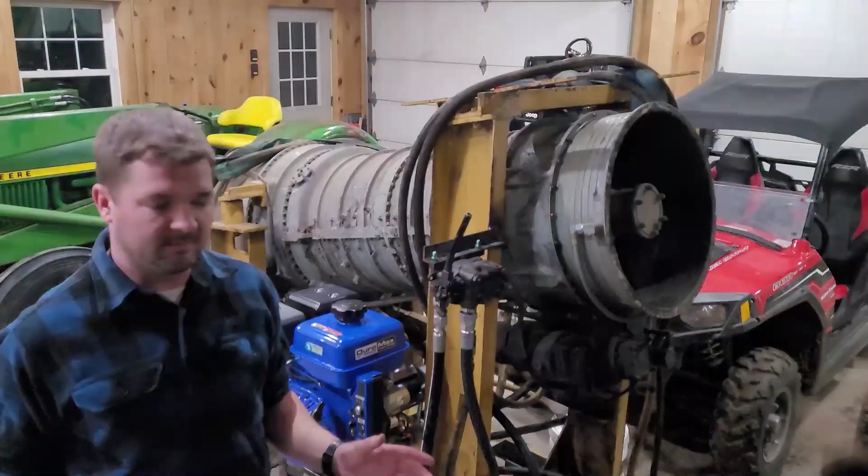Ken Warby in the Spirit of Australia piloted that boat. So that's kind of how the whole jet pontoon project got started. I got the jet engine, got it running, needed an application for it that doesn't go 317 miles an hour, and here we are. So in the spring, we'll have plenty more updates. We'll get that pontoon going a lot faster. We've got a lot of stuff engineered and planned already. So that's what we have in store for 2023.

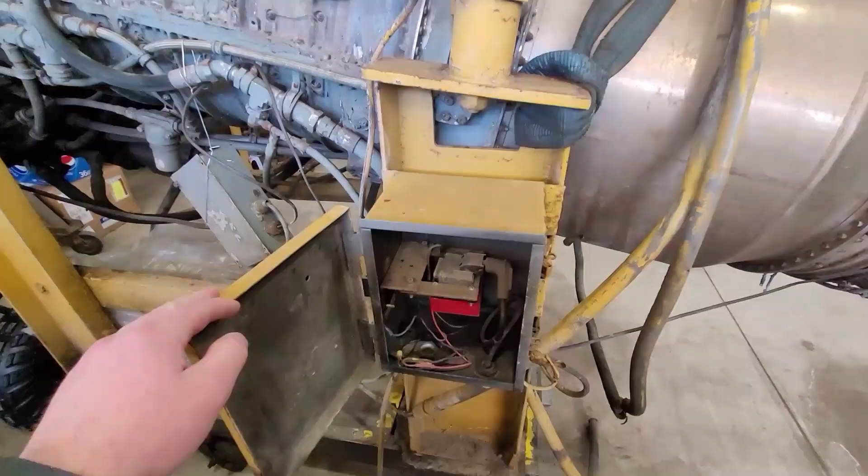Let's get to the jet pontoon action. Probably looks like it's in a little rougher shape than it really is. I've gone through it once already, just to get a good understanding of what I'm going to need to get this thing running again. Alright, so we finished our hydraulic power unit. So we're going to try to start this thing up for the first time. I don't expect things to go perfect, so as long as we're in the right direction, at least there's some stuff we can fix and learn along the way.

So we've got our tank now, all our lines hooked up. We've got our motor that we're using to start this pump. And then we mounted up our hydraulic valve. We should be able to shift this valve just ever so slightly forward, and that should start to get the inside of this turbine rotating.

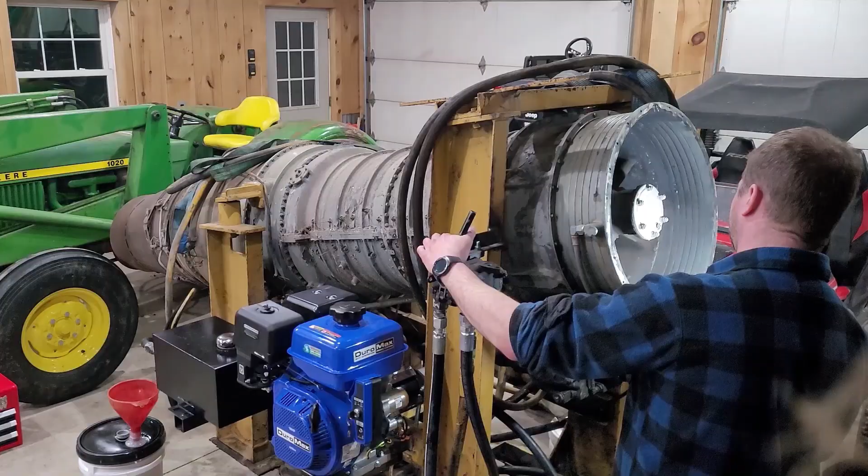She's alive! So I'm gonna draw up and design a quick 4.5 gallon fuel cell. We'll get it cut out, welded up, so we can hook an airline onto it with a pressure gauge, so we can adjust how much pressure goes into it, and we can fill that with fuel, and then that should be sufficient to start the jet. So first things first, we'll do a quick little fabrication montage, and then we'll roll the thing back out and see if it starts.

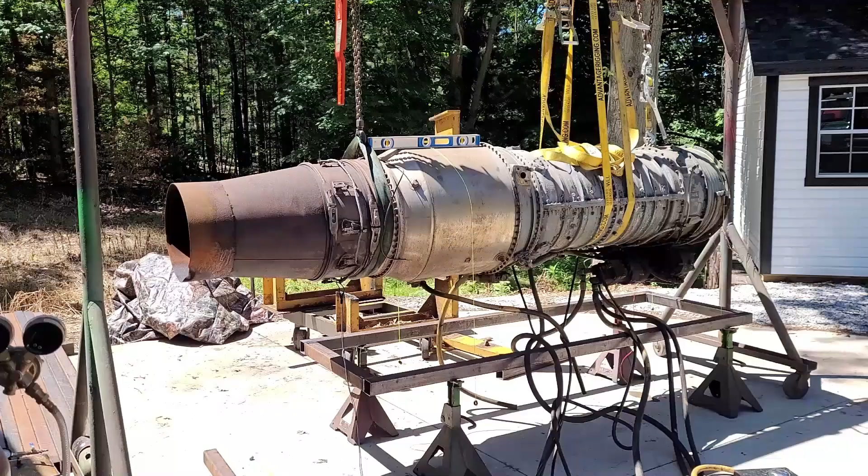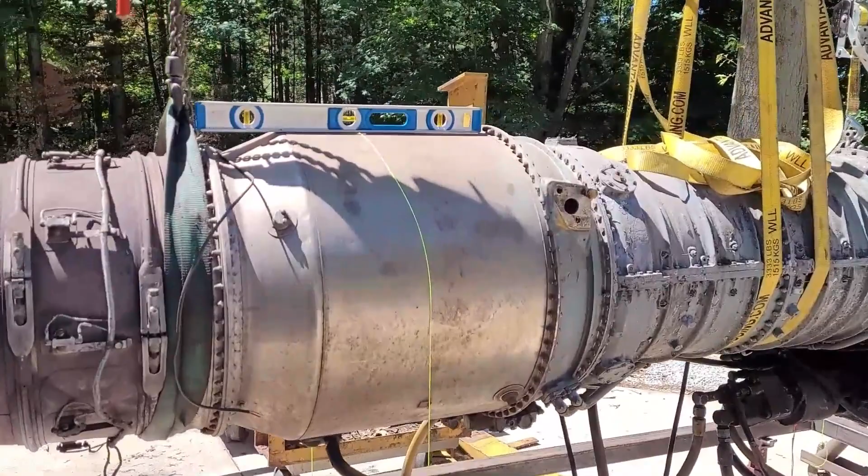Time to do some fabrication, so I'll show you what we got going on. So we've got the jet hanging from the chain falls. We've got our plumb lines coming down, and our frame underneath is all squared up and leveled. So it's about as square as we're gonna get this thing. You can see the combustion chamber sitting pretty level there.

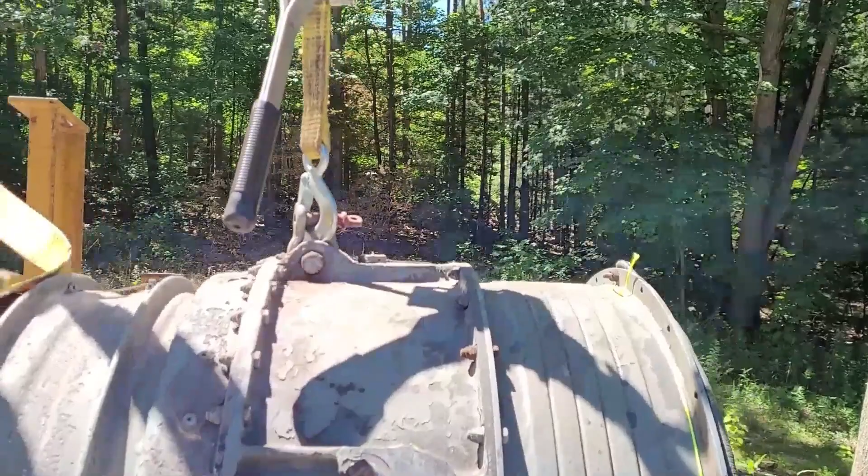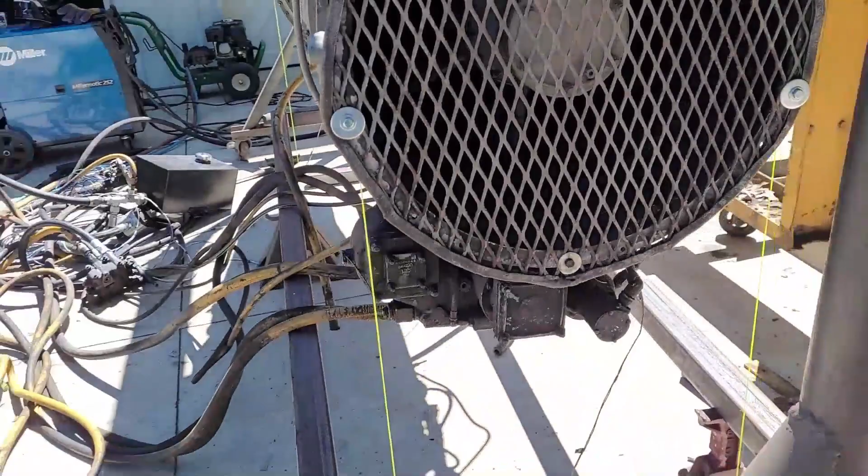We've got our plumb lines running down, measured off both sides. Then we've got the same thing up front hanging from our center link, and then 2 more plumb lines. And we're measuring off the front and the side of the frame to make sure we're square. So that should be everything we need. And just start measuring, cutting cross members.

We're gonna have a hoop come up top with an adjustable link so we can adjust the angle of this thing. So I did measure, do a little math to make sure there's enough room underneath. So if we're 5 degrees tilted up or 5 degrees tilted down, we won't bottom out the gearbox on the floor.

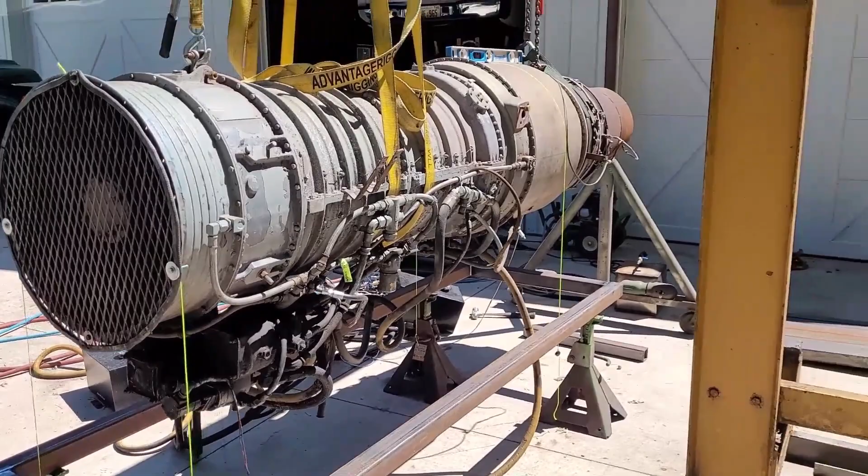So yeah, I think that's it for now. I'll give another update here once I get everything welded in, and then it should be ready to sit on the pontoon.

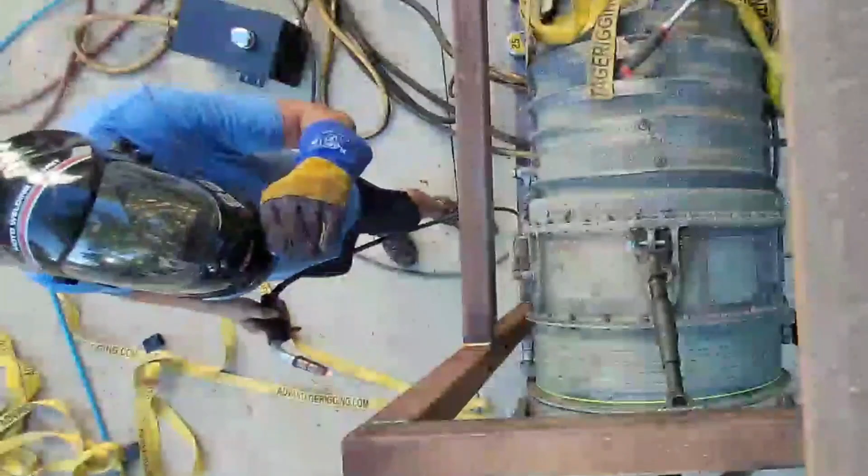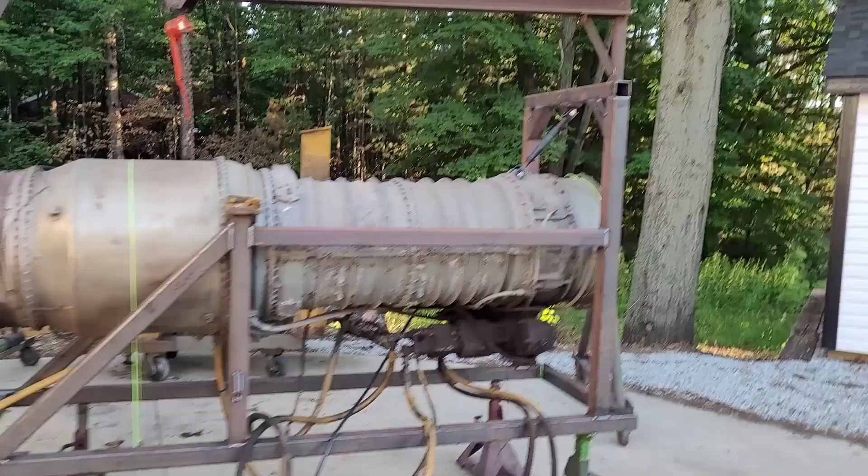Well, I started this thing, I think when the sun was just coming up, so I think we're about 14 hours into the fab process, but it is officially sitting on its own feet on the ground on the pontoon mount. Got a pile of sheet steel here, got them laid up on the plasma table, laptop ready to go, and then we've got our build sheet. So that's the tank.

60 inches by 20 by 20, 2 baffles. Got our kind of bill of material laid out. Neighbor's gonna help me weld these up, so I threw together some quick build sheets just to call out the parts. There's some little notches and little things, some relief cuts, stuff like that, but pretty simple. It's just a box with some baffles.

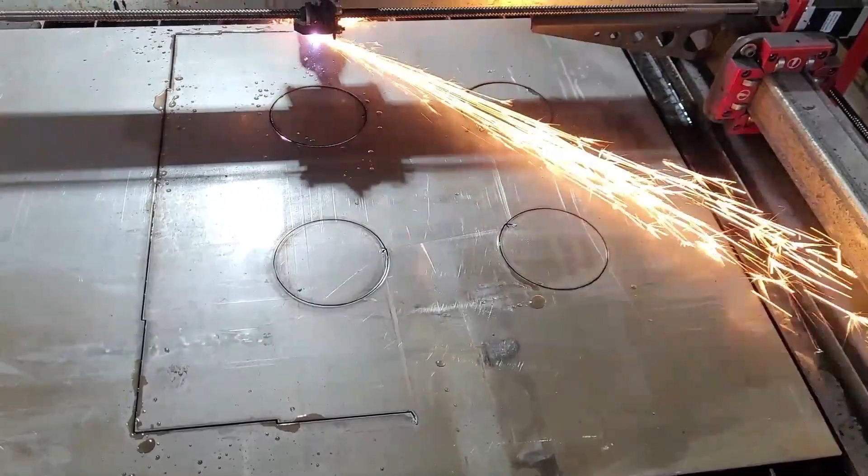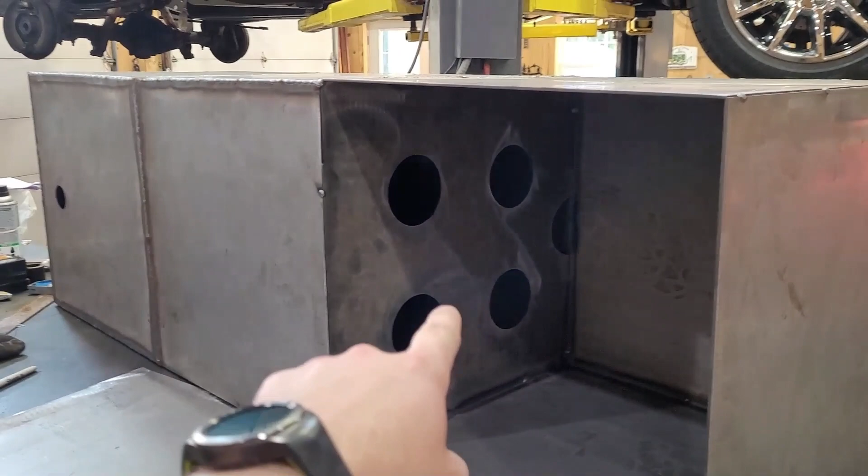All right, so my neighbor Eric, who's been helping me on this project, used his garage and all his fabrication equipment, has got this whole tank welded up in a short day. We got our baffles, and like you saw in the design, all the individual panels. Got one last panel to throw in there. Add a couple fittings, and we're ready for fuel.

Get in the backyard where the neighbor's got an excavator, where we can pick this whole thing up and get it up high enough into the air to put onto the pontoon. So it's an exciting milestone. Be the first jet engine on a pontoon as far as I'm aware. Off we go.

Well, this is where progress ends for now. There was another milestone we achieved. Have the jet mounted on the pontoon. So for the first time ever, we've got this. Okay, so now getting the plywood put on. Nothing really fancy to show here. Just got your plywood. Re-drilling through the existing holes, putting new hardware in. So just hammering a bolt through, hitting it with the impact.

And then once I get all the flooring on, I've got this kind of wood textured vinyl flooring that'll go down on top of it. So I gotta roll that stuff. Alright. Well, let's see if the outboard starts and be on our way.

Oh, also a unique feature, forward is reverse and reverse is forward. So that's how jet pontoons work. Sorry if you guys didn't know that. Alright, we're running. Sitting low in the back.